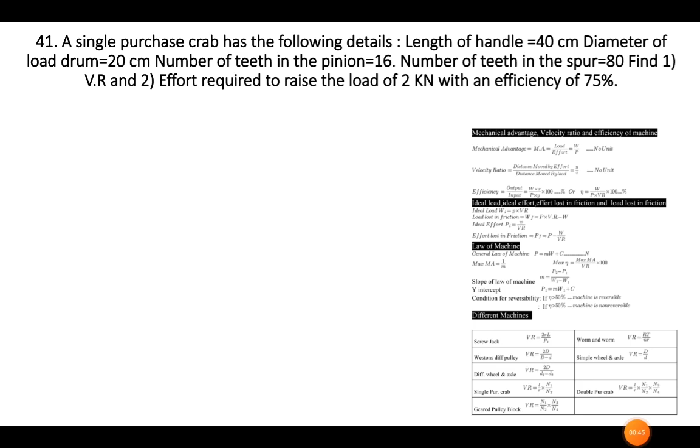Length of handle is 40 centimeter and diameter of the load drum is 20 centimeter. Number of teeth in the pinion is equal to 16 and number of teeth in the spur is 80. So we have to find out VR and effort required to raise the load of 2 kN with an efficiency of 75%.

So here they have given the problem of single purchase crab. So the formula for single purchase crab is VR is equal to L by R into N1 by N2.

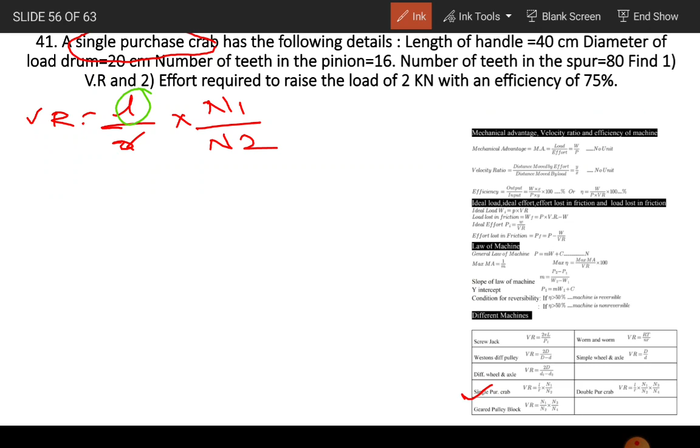Okay, so here the L is the length, while R is the radius, and N1 and N2 are the teeth of spur and pinion respectively. Okay, so keeping the value in the formula,

so that L is equal to 40 divided by the diameter of load drum is 20. So if diameter is 20, then radius will be 10. Number of teeth on spur are 80 and number of teeth on pinion is 16.

So VR is equal to 4, 5, so VR of single purchase crab is 20. So the VR is calculated as 20 and we know that VR doesn't have any unit.

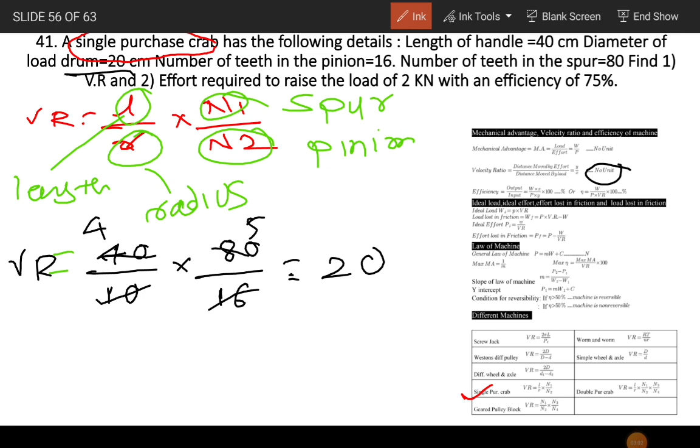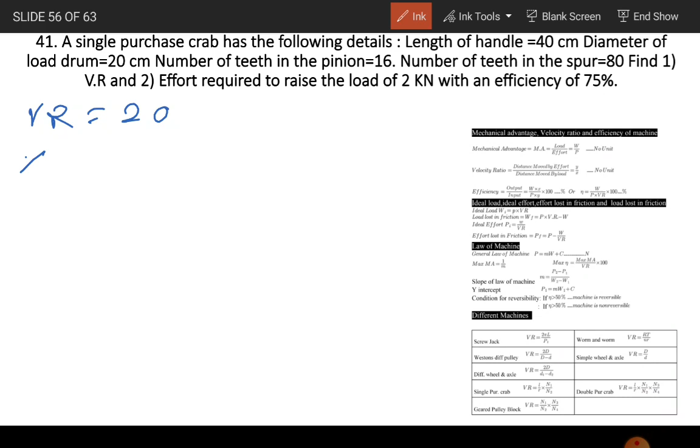So after this we have to calculate the effort required to raise the load of 2 kN. Here VR is equal to 20, so if we apply the formula of efficiency, percentage efficiency is equal to MA by VR into 100. Putting the value of VR and efficiency, 75 is equal to MA divided by VR, that is 20, into 100.

So MA is equal to 75 into 20 by 100, that is 15. So MA is equal to 15.

If MA is equal to 15, then we know that MA is equal to W by P, and we know the value of MA as well as the value of load, that is 2 kN divided by P, so that P is equal to 2000 divided by 15, which is equal to

133.3. Here we have converted kilonewton into Newton, that's why the unit of effort is also Newton. So in this way we have solved this problem. We will see next problem.

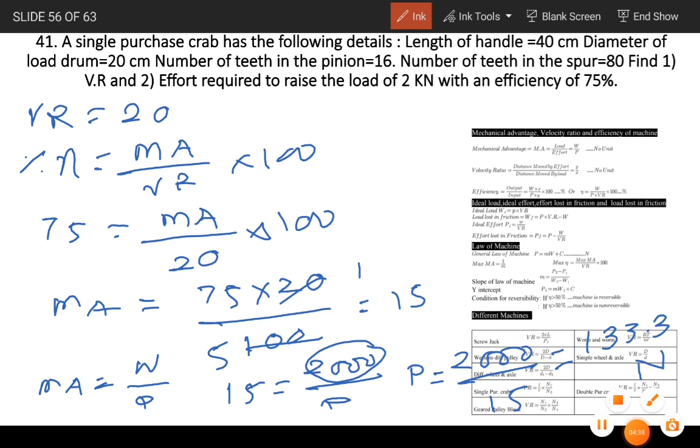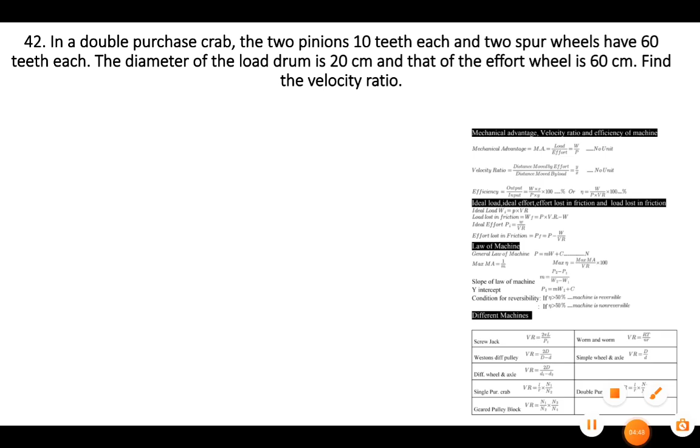Here they have given it as a double purchase crab. So we will see, the formula for finding VR is L by R into n1 by n2 into n3 by n4.

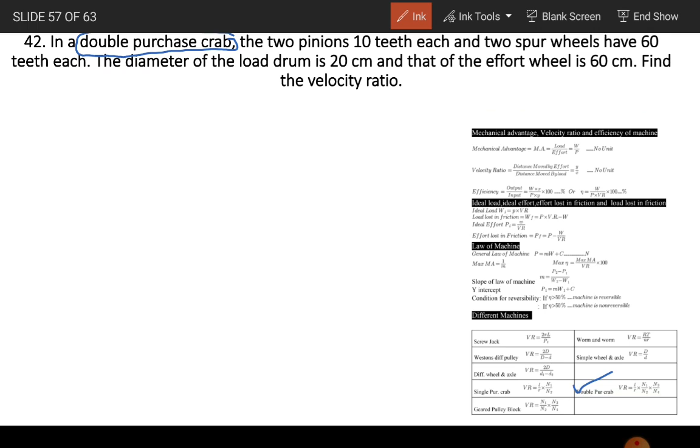So in this formula, if we can find out, then VR is equal to L by R into n1 by n2 into n3 by n4. Okay, so in this equation we know that L is the length, R is the radius, while n1 and n2 are the teeth on pinion, similarly n3 and n4 are also the teeth on spur and pinion.

Okay, so in this equation they have given the length of 30. In this equation the effort wheel having diameter 60, so that L is equal to diameter of effort wheel by 2, that is 60 by 2 is equal to 30.

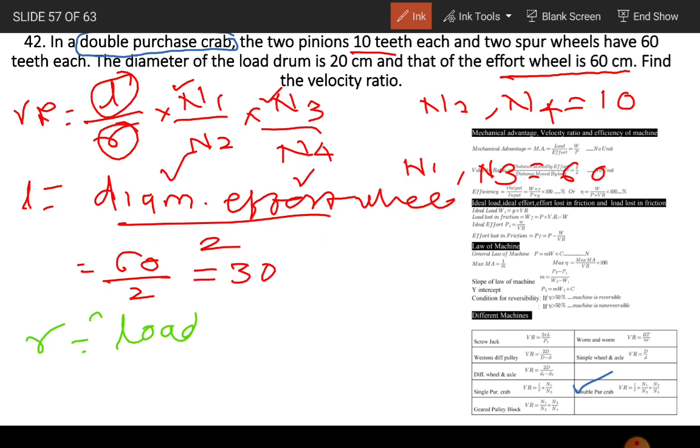Similarly, R is equal to load drum divided by 2, means diameter of load drum by 2, so it is 20 by 2 is equal to 10. So we have to put all the values to find out velocity ratio.

So VR is equal to L by R into n1 by n2, that is 60 by 10 into 60 by 10. Okay, so 0 0 get cancelled, 30 divided by 10 is equal to 3, so it is 36 into 3, that is 108. So we got the value of velocity ratio, and which is equal to 108.

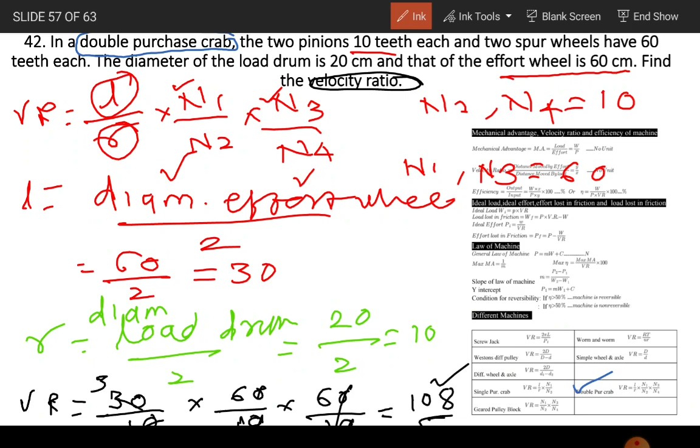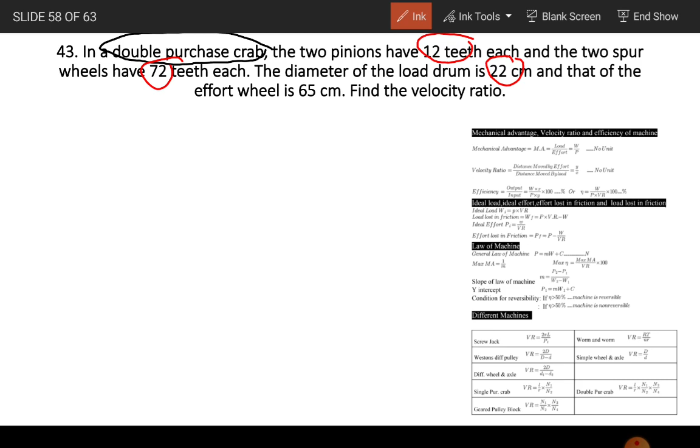Similarly, like the last problem, this is a problem on double purchase crab, where two pinions have teeth 12 and a spur wheel having teeth 72, and diameter is given as 22. So it is exactly, and the diameter of F... this is the homework.

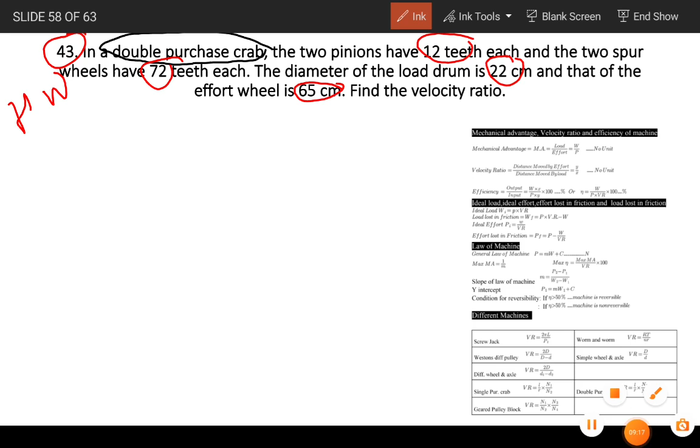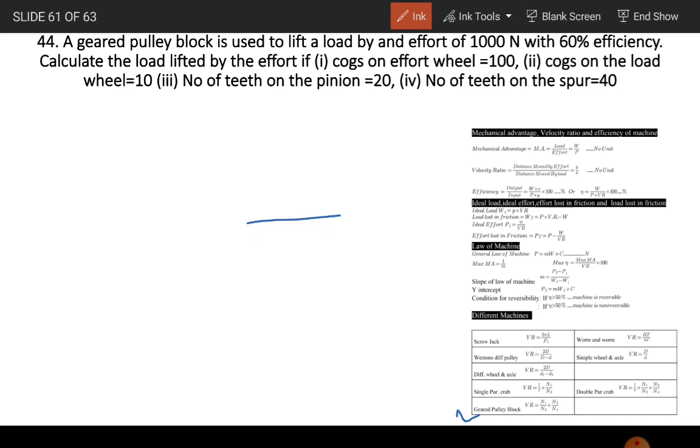Now see the problem on geared pulley block. Here the formula to find out Vr is n1 by n2 into n3 by n4. So firstly we will see the formula.

Vr is equal to n1 by n2 into n3 by n4. So here in this formula, this is our P, that is 1000 Newton, while efficiency is 60.

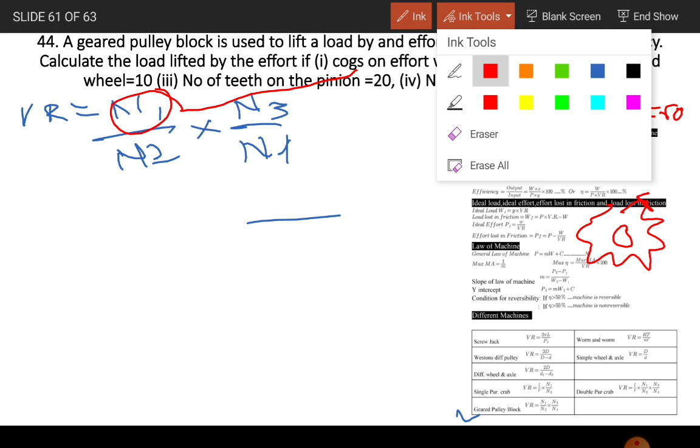Here the N1 is the cogs on effort wheel, which is equal to 100. So what is exactly cogs? Suppose this is a gear, then this portion is called a teeth, while the portion which is between two teeth is called a cogs. So N1 is equal to 100, while the cogs on load wheel is equal to 10.

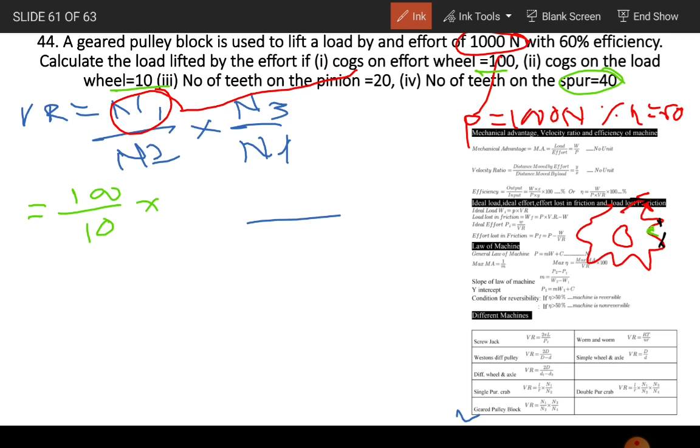So which is equal to 100 by 10 into N3 and N4. N3 is the number of teeth on spur, while N4 is the number of teeth on pinion, which is equal to N4. So now it is 40... is equal to 20, and it doesn't have a unit.

It is unitless. Now we have to find out W, that is load. So efficiency is equal to MA by VR into 100. So in this equation, efficiency is 60 is equal to MA by VR, the value of VR is 20, into 100.

So MA is equal to 60 into 20 divided by 100, which is equal to 12.

So we know W by P is MA. So W by P is equal to 12. So we know W by the value of P is 1000 is equal to 12. So W is equal to 12 into 1000. So the value of W is 12,000 Newton.

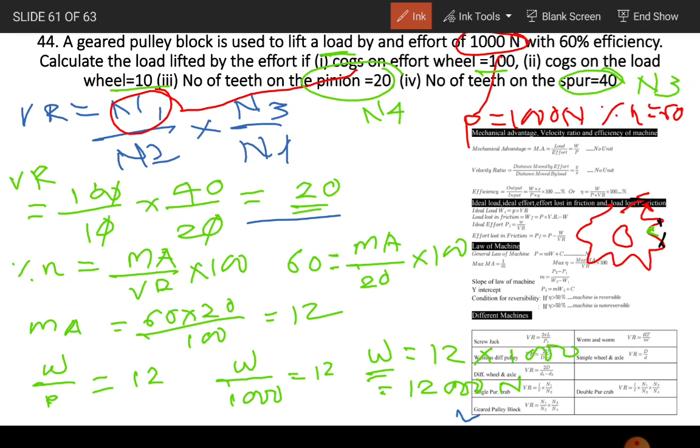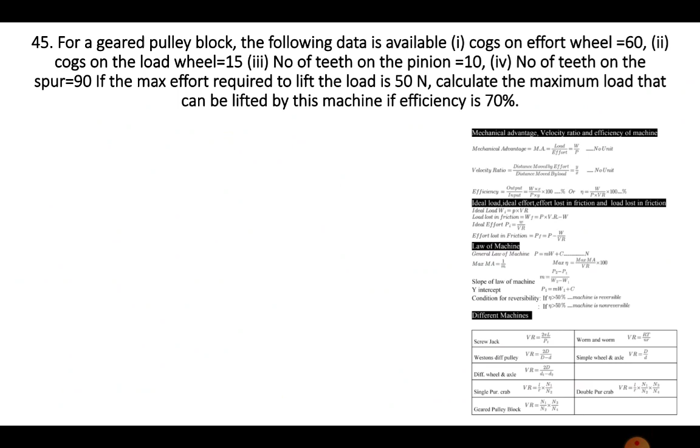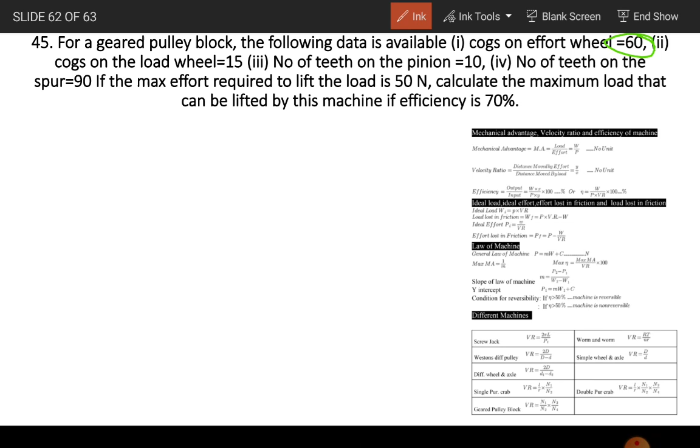So this is the same problem which is on geared pulley block. Here, like the previous problem, cogs on effort wheel is 60, while the cogs on load wheel is 15.

Now about N3 and N4. N3 is the number of teeth on spur, which is 90, divided by number of teeth on pinion, which is equal to 10. So VR is equal to 36.

Now we know, where to calculate the load. When effort required to lift the load is 50, means P is equal to 50, and efficiency is equal to 70.

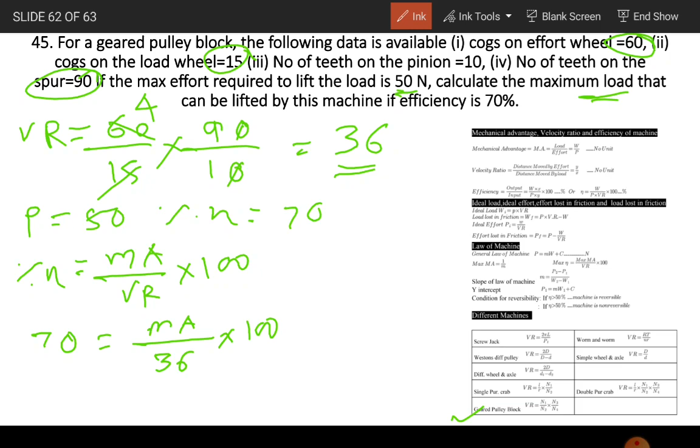So we know the formula of efficiency, that is efficiency is equal to MA by VR into 100. So efficiency is 70 is equal to MA, which we have to calculate, by VR we have just calculated, it is 36, into 100. So MA is equal to 70 into 36 by 100.

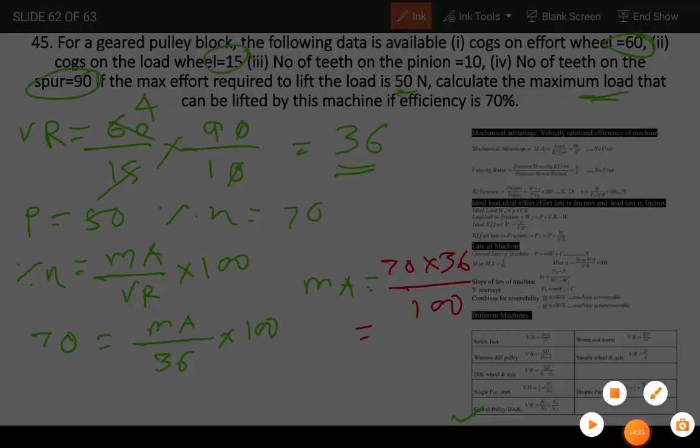So if we calculate, the value of MA is equal to 25.2. So the value of MA is 25.2, is equal to W, which we have to calculate, and the value of P is 50. So W is equal to 25.2 into 50, which is equal to 1260 Newton.

So in this way we have calculated the value of load, that is W is equal to 1260 Newton. So in the next lecture we will see the problems on centroid and center of gravity. Thank you.